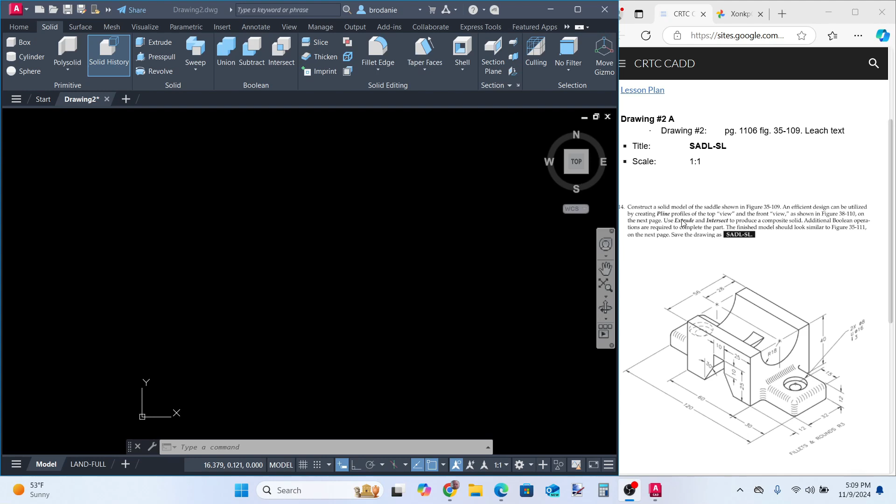Okay, let's draw the saddle really quick. It wants us to draw the front and the top, and then intersect them according to the instructions. So I want to start off with this front piece first.

I'm going to change my view to a larger one, and I am going to go with a front coordinate system. Okay, so now we're looking at the front. When we look on top...

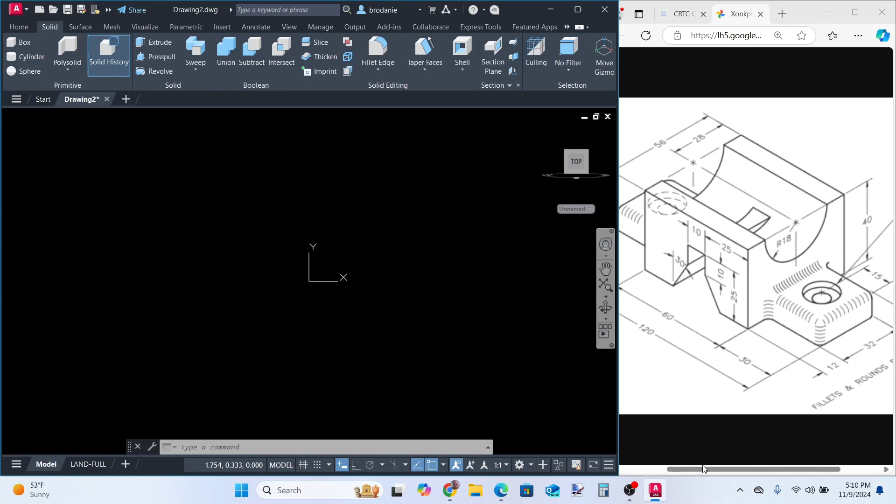I'm going to go start with this bottom left corner, draw up, over, down, like that. So L, enter. I'm going to start at 0, 0, and turn on my ortho.

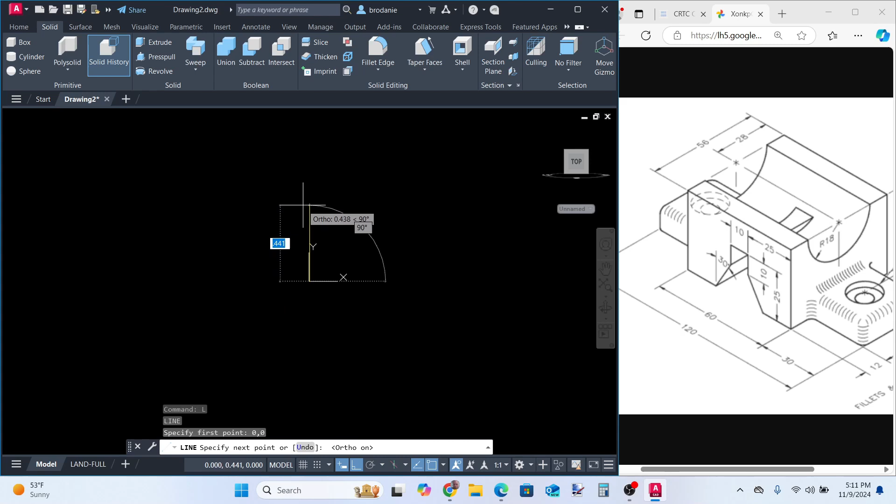Goes up 12, over 30, up 28, I believe, up to 40, so up 28, over 60, down 28, 30,

Try it again. Endpoints on, so I can start back where I messed up. 30, down 12, back 120, or just back to home. Okay, that looks pretty good.

Now I gotta draw this little cut out piece. To do that, let's see, do I have midpoint turned on? I'm going to just come straight down and start drawing over.

And that is right in the middle, comes down. Let's see, the total height on this guy is 40. There's 25 there, so 15.

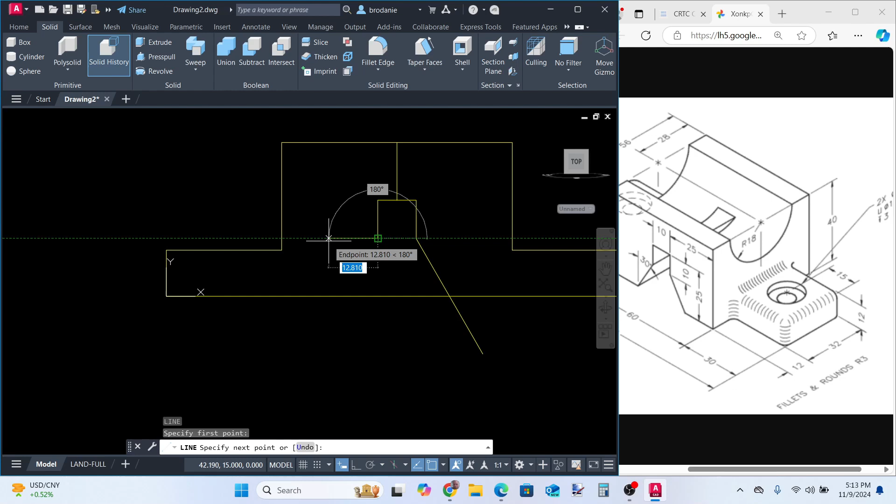Enter. Now same thing over here. I'll enter. And this is going to be 180 plus 30 plus 30, which is 240. So tab 240 from angle. Enter. Now TR, enter, enter.

Make my sound effects as I'm doing that. Okay, there is that side, the front side. Now I'm going to change my view to the top. Front to top.

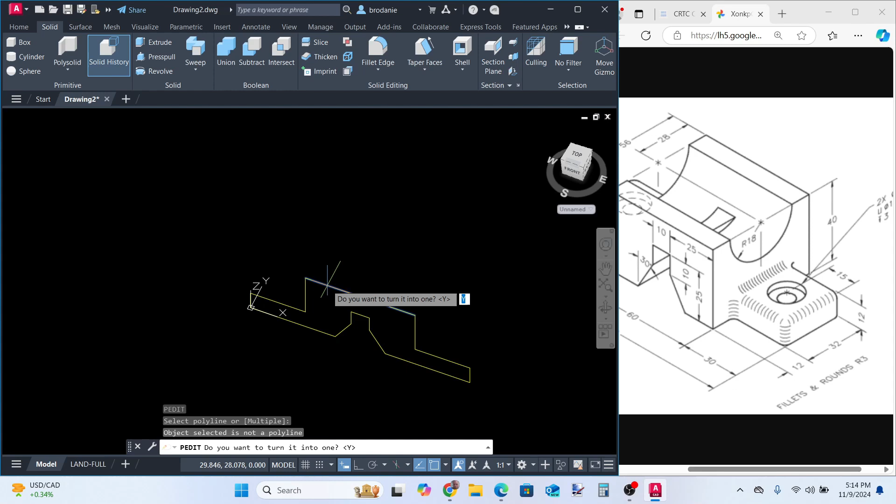Oh, before I go any further, I'm going to take this and turn it into a poly. PE for edit. Select something. I want them to become one. I'm going to be joining. And then I select everything I want to join. Enter. Now let's see if that is one item. Yep, there you go. I'll move my mouse over and it all turns on.

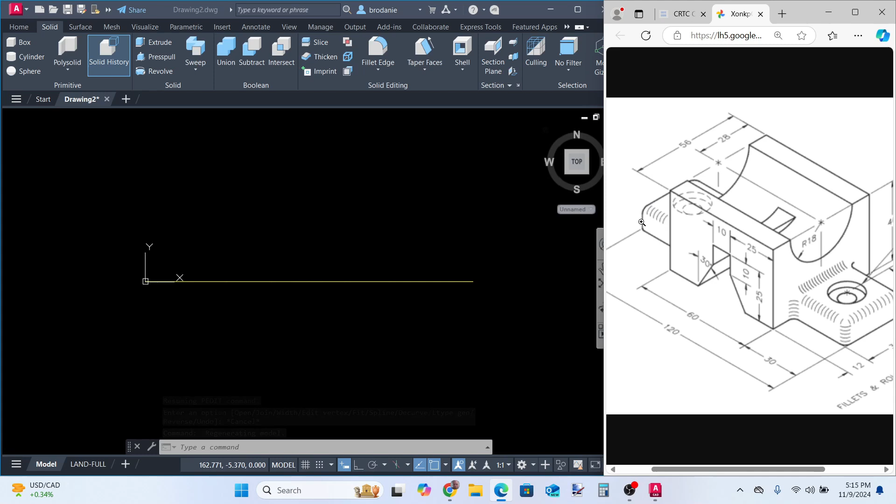So now let's do the top view. I'm going to start right here and then go up. So that location should be I'll enter over 0, so 0, comma, and up 12, yes.

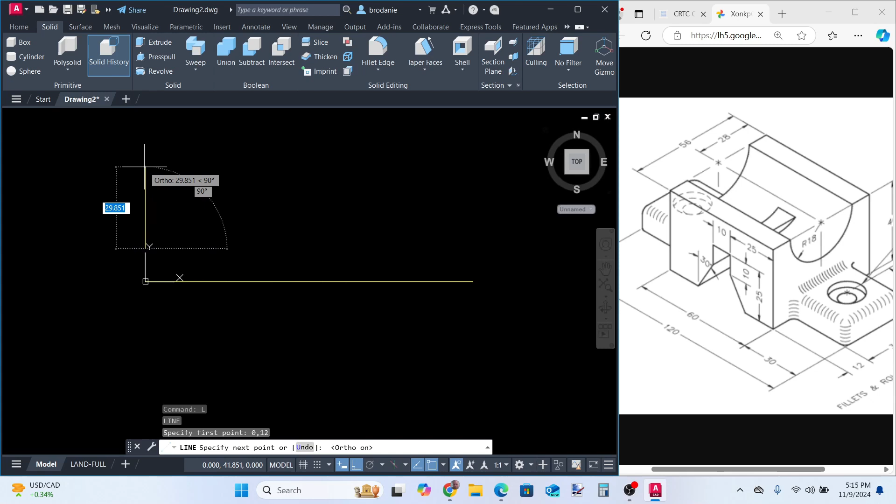Get my straight lines again. Comes over, goes up 32, if I remember correctly. When we draw that's like 17 times. Okay, so 32.

Then it comes over 30, 12, 60, 12, 30, 32, 30, 12, 60, 12, and back to home, yay!

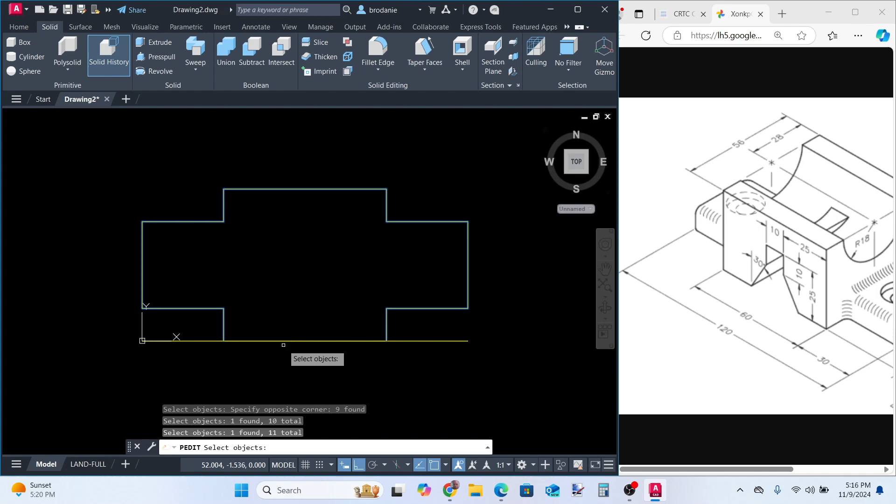Okay, now let's turn that into a poly. PE, and select one of the items, make it one, we're going to join things together, join, plus this guy, plus this guy, plus that guy, enter. Escape, now put my mouse over it, yes. Okay, beautiful.